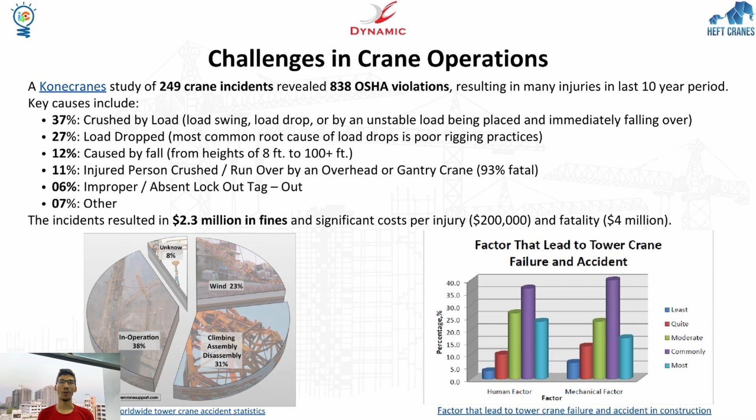Over the last 10 years, 249 crane incidents resulted in 838 OSHA violations, leading to 2.3 million in fines and severe injury or fatality costs. The main causes of crane accidents include crushed loads, dropped loads, falls, and improper lockout practices. 93% of overhead crane accidents are fatal, emphasizing the need for a stricter global safety measure. Globally, 44 crane-related fatalities per year occur, mainly due to transportation errors, falls, and equipment strikes.

In India, violations of IS 4573, which covers construction, inspection and maintenance, and IS 3177, focusing on safety devices and operator training, are common, leading to unsafe operations. Implementing comprehensive safety measures and ensuring strict adherence to these regulations can significantly reduce crane-related hazards. Regular inspections and proper training are crucial to mitigate risks and ensure safe work environments. By addressing these vulnerabilities, we can protect lives and prevent costly accidents.

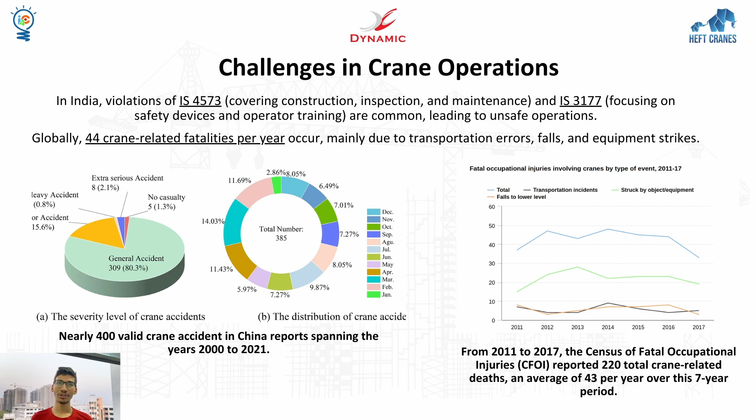Our proposed solution aims to address these challenges by integrating advanced sensors and real-time monitoring. Our system will reduce injuries, minimize financial losses, and operational downtime. Now let us take you through our solution in action and showcase the prototypes we have developed to make crane operations smarter and safer. So let us start with our basic workflow of how our collision avoidance system will work.

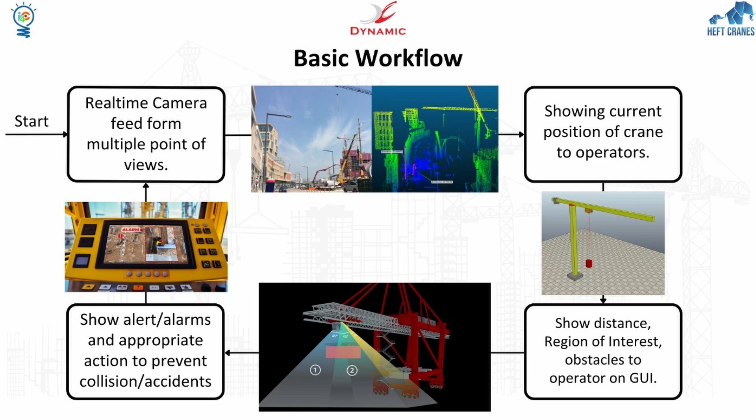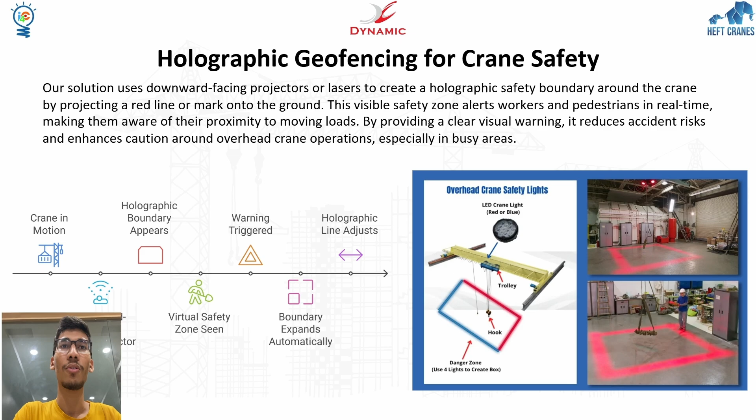So the next feature in our solution is holographic geofencing for crane safety. In this solution, a holographic projection is made on the floor above which the load is present. This is specially for EOT based cranes which are inside the factory and they move in X, Y and Z directions. The features include downward facing laser projector activation, holographic boundary, virtual safety zone seen. The next feature in this solution is AI powered image recognition.

Now moving on to AI powered image recognition for crane safety and collision avoidance. Cameras integrated with advanced computer vision algorithms can detect and classify various objects in real time, including workers, equipment, and crane components. This continuous monitoring helps in identifying potential risks in dynamic environments and supports proactive safety measures.

Two major challenges we address here are: first, swaying loads. During lifting operations, large loads tend to sway and this motion can create critical hazards, putting individuals in danger of being struck. Second, object drops. Operating overhead cranes comes with a serious risk of accidental object falls, which can lead to severe injuries or even fatalities if

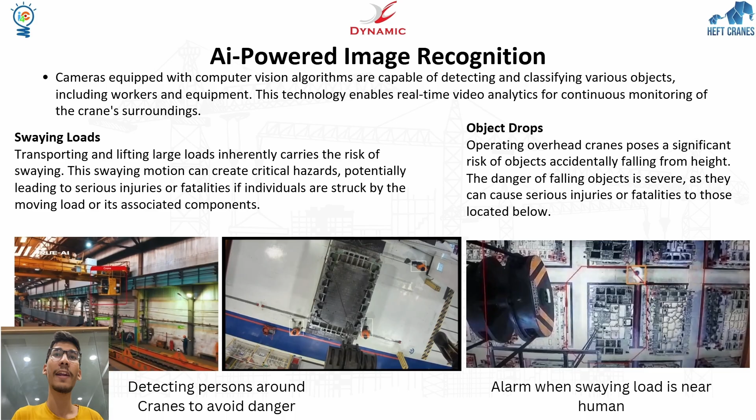personnel are present below. To tackle these issues, we have developed two prototypes. In prototype 1, we detect the presence of personnel directly in the crane's danger zone from an overhead camera, issuing real-time alerts to prevent accidents.

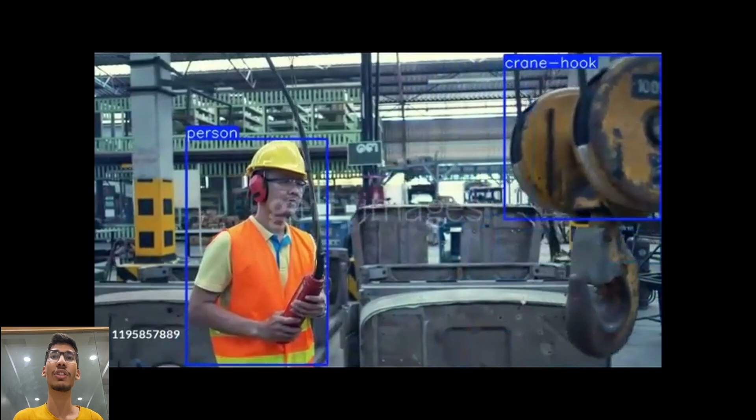In the second prototype, we detect both crane hook and nearby individuals simultaneously, helping to predict and avoid possible collisions in advance in case of tower cranes, as well as EOT-based cranes. This AI-based solution aims to create safer industrial crane operations through continuous monitoring and timely alerts.

For detecting both persons and crane hooks, we used YOLO V8, which is one of the most advanced object detection models available today. It's widely recognized for its real-time performance and excellent accuracy, making it ideal for safety-critical environments like crane operations. The architecture of YOLO V8 consists of three main components: the backbone, the neck, and the head.

The backbone comprises CSP Darknet to extract strong and meaningful features from the images. The neck, built with PANet and FPN layers, allows the model to detect objects at multiple scales, whether they are small or large. And finally, the head predicts the bounding boxes, confidence scores, and class probabilities quickly and efficiently.

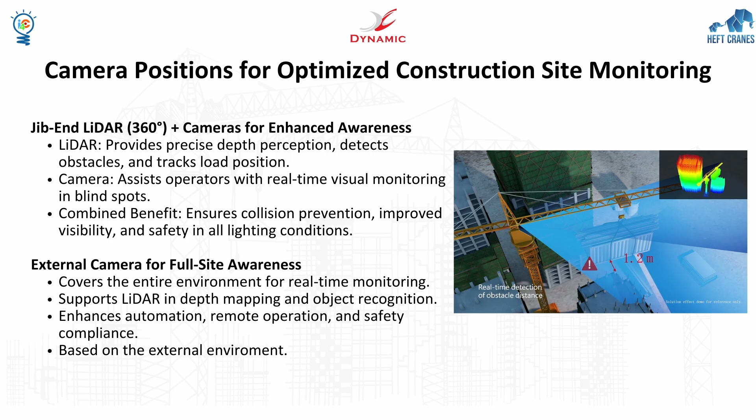Proximity and monitoring is one of the features for which we have proposed the solution. The proximity and monitoring system provides an essential layer of safety and control by continuously measuring the distance between the crane and its surrounding barriers. Using sensors, it ensures precise spatial awareness, thereby helping operators make informed decisions in real time.

At the heart of this system are LiDAR sensors, which generate an accurate 3D representation of the crane's environment. This detailed mapping enables operators to visualize potential obstructions, including nearby structures and materials, ensuring safe maneuvering at every stage of operations. In scenarios where objects are positioned very close to the crane, ultrasonic sensors come into play. Their narrow detection range proves particularly useful for detecting obstacles at short distance, helping prevent accidental collisions.

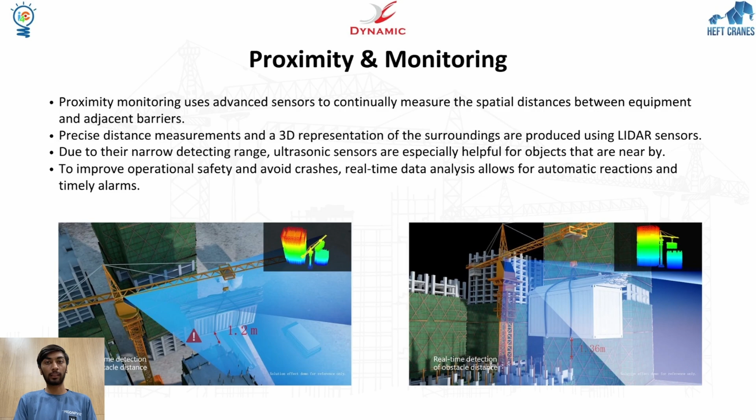By integrating these sensors into a unified monitoring framework, the system continuously analyzes incoming data, triggering timely alarms and warnings when a hazard is detected. Furthermore, real-time data analysis enables proactive adjustment and automatic responses, thereby reducing human error and enhancing overall operational efficiency. Through its comprehensive proximity detection and monitoring capabilities, this system significantly minimizes collision risk and reinforces a safer working environment for both personnel and equipment.

Our proximity and monitoring solution incorporates a two-leveled approach for object detection using both TF Luna sensors and Lidar. The first level utilizes TF Luna sensors enhanced with electromagnetic and infrared frequencies to cover a range of 30 meter to 60 meter. These sensors are strategically installed along the horizontal bar boom of the tower crane, enabling detection of objects in overlapping areas or those very close to the crane. This layer ensures immediate alerts when an object encroaches within a critical proximity.

The second level is powered by Lidar, which provides a comprehensive 3D mapping of the surrounding environment. This high fidelity mapping offers unparalleled depth, precision, and spatial awareness, supporting robust hazard detection beyond the short-range capability of TF Luna sensors. By combining these two layers, short-range multi-point proximity detection with TF Luna and wide-range detailed environmental mapping with Lidar, our system forms a comprehensive shield against potential accidents. This dual-layer approach not only maximizes safety by ensuring timely alerts, but also enhances overall operational efficiency in crane operations.

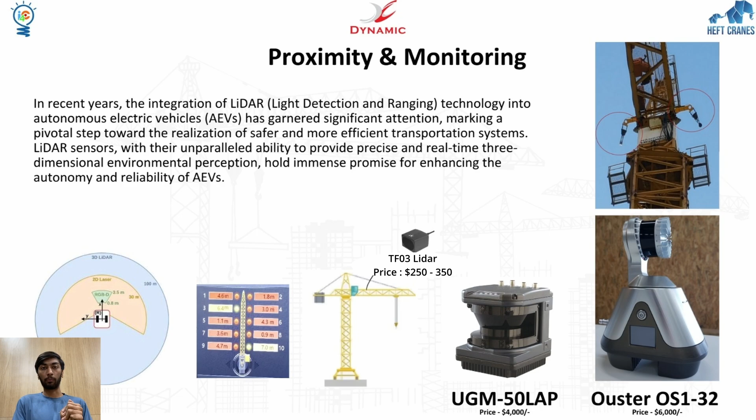In high-demand industrial environments, multiple cranes working together can often lead to operational bottlenecks, unexpected delays, and most critically, safety risks. Traditional crane management systems rely heavily on manual coordination, leaving room for errors, inefficiencies, and potential collisions. To solve these challenges, we propose an intelligent system that revolutionizes crane operations by combining real-time monitoring, adaptive scheduling, and AI-driven safety measures. Our goal is to ensure that cranes work seamlessly, efficiently, and without risk, even in crowded multi-crane environments.

At the core of our solution is priority-based scheduling, which ensures that most critical tasks are handled first while continuously monitoring crane positions and loads. The system operates in two states. First is safe state. Cranes can operate normally without any restrictions, and second is unsafe state. A risk of collision or interference is detected, the system immediately alerts the operator and suggests a way to return to a safe state. To prevent unsafe conditions, our system provides alternate movement paths. Instead of stopping operations completely, the system evaluates if a crane can approach the task from another direction.

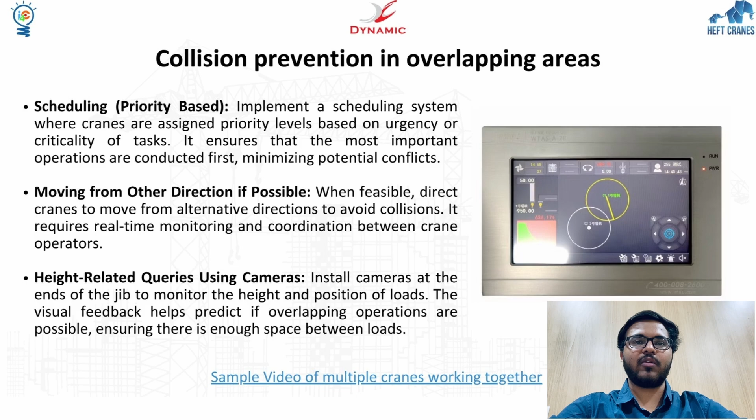So this is the prototype that we have developed for geofencing using Python. So here we upload an aerial image of a construction site, and then we plot the restricted areas, which can be some residential areas or buildings, to avoid any possible accidents. So we are marking a total of 4 restricted areas. So this can be done by ground operators and can be monitored as well. The center 2 circles are for the cranes. The left one is blue and the right is given a green crane.

Here you can see that the cranes can be rotated in every possible direction. However, they cannot enter the red zones as they are restricted areas, and when a crane tries to enter, the alert is generated. Also, when 2 cranes get very close to each other, the proximity warning is displayed as well. Here is the proximity warning as well.

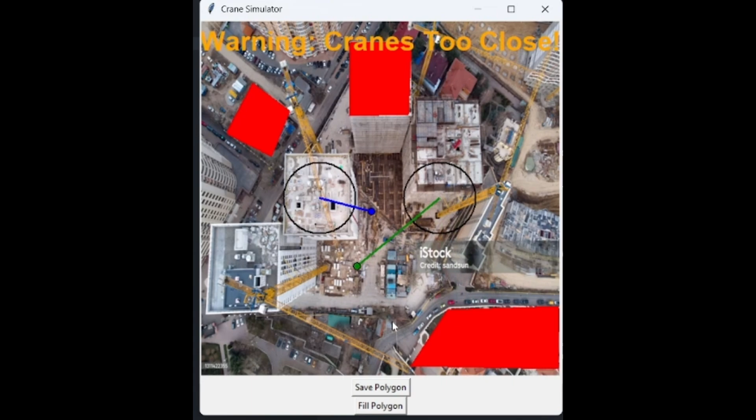Load sway is a major challenge in tower crane operations. It occurs when the suspended load swings like a pendulum due to inertia, sudden stops, changes in direction, or due to external forces like winds. Uncontrolled sway can lead to collisions, load mismanagement, safety risks for ground workers, as well as equipment. To detect swings, inclinometers are used. This measures the radial swing angle alpha and the rotational swing angle beta to track the movement. Programmable logic controllers process the sensor data and adjust the crane movements using real-time feedback control.

By continuously adjusting the motor torques and the trolley speeds based on real-time feedback, the PLC enhances the stability and precision of the crane operations. To stop load sway efficiently, techniques like trajectory planning, adaptive control, and virtual spring mass systems are implemented. We use artificial intelligence to predict and counter swing.

The best control strategies can eliminate sway within 6 to 8 seconds, while traditional methods may take 10 to 15 seconds or longer. Without proper control, swing can persist for 30 seconds or longer, increasing the risk of accidents. This solution ensures smoother, safer, and more efficient crane operations.

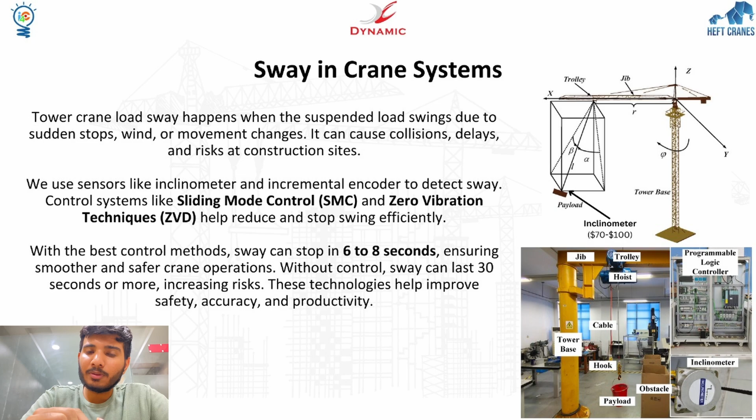So in our platform, data logging plays a crucial role in improving safety and efficiency. First, in our AI-based detection prototype, we log crane hook trajectories, load movements, and human detections to analyze patterns and improve accuracy. Second, in our multi-crane collision prevention system, we record crane positions and movements to visualize paths and avoid conflicts. And third, through Lidar monitoring, we log obstacle detections and near miss events, enabling continuous safety audits and smarter predictive algorithms for future operations.

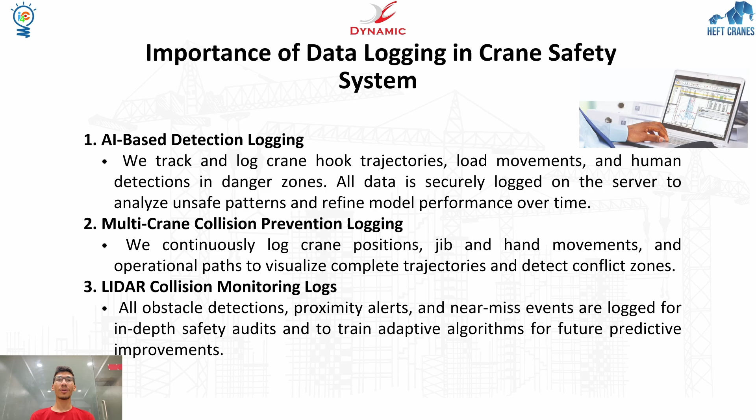Our tech stack starts with proximity monitoring, employing advanced sensors such as Lidar and ultrasonic technology to maintain a vigilant watch over crane surroundings. By continuously measuring distances, it swiftly identifies nearby obstacles, ensuring collisions are prevented in real time. Next, AI-powered detection uses real-time image recognition to detect people, crane hooks and equipment, enabling safer and more efficient operations.

Building upon that is our crane scheduling algorithm, which draws on the principles of basic compiler design and microprocessor scheduling to prevent crane movement conflicts, coordinate tasks, and reduce collision risk across multiple cranes. Operators interact with these features through a user-friendly dashboard, offering clear, real-time information without complicated charts. Visual and audio cues are also supported, ensuring swift response to multiple potential hazards and minimizing stress in a very fast-paced environment. Moreover, our system is built with scalability in mind, effectively managing operations for multiple cranes across expansive work sites.

And finally, data logging, which is a very important task, continuously records the safety events and operational metrics on a secure cloud server, providing immediate insights for decision making and fostering continuous improvements in crane safety. So this is our whole idea of the tech stack that we will be using in our prototyping.

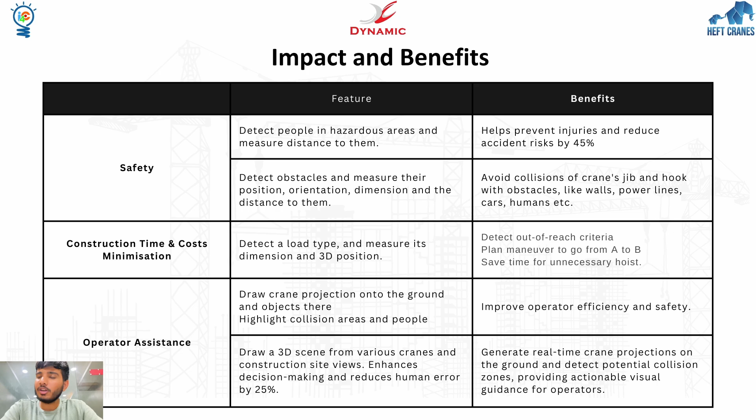Beyond safety, we optimize crane movements by detecting load types and calculating their positions. This can reduce unnecessary lifts by 40% and shorten project timelines by around 20%, leading to operational cost savings of approximately 15%. To further support operators, we have developed an interactive GUI that provides a clear view of crane movements and highlights potential collision zones. This improves decision making and reduces human error by 25%. With this advancement, our system ensures safer, more efficient, and cost effective crane operations throughout the construction timelines.